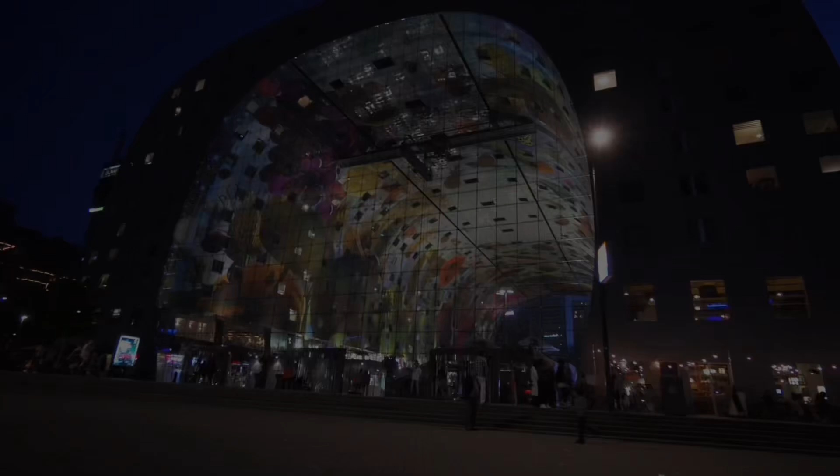Navigating the challenges of unstable soil, the construction of the Markthal in Rotterdam reflects the commitment to modern architectural innovation.

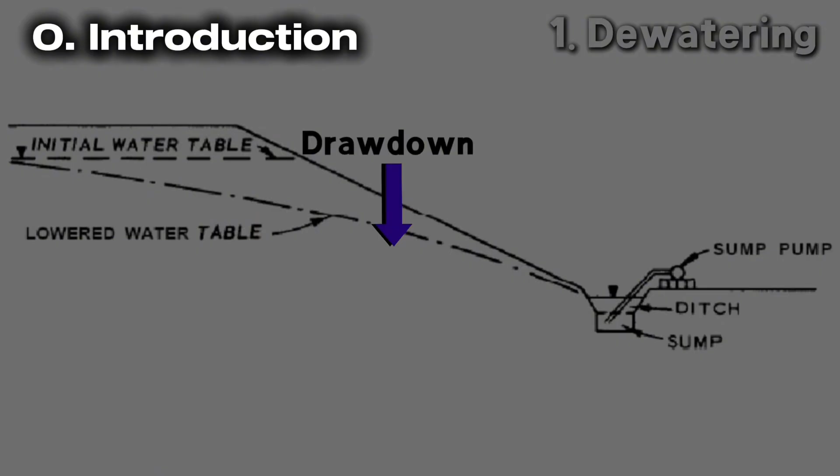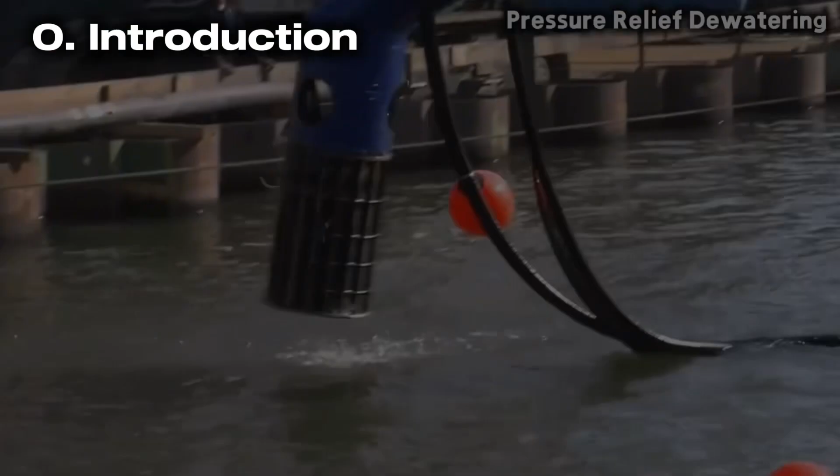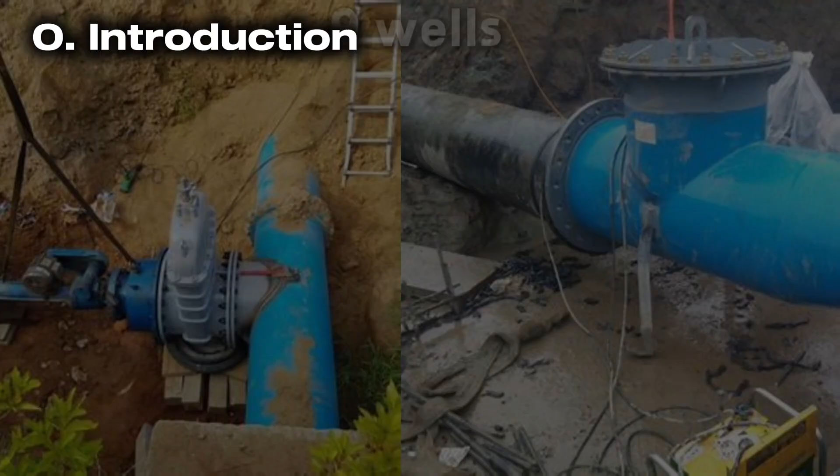After laying 480 tons of reinforcement, a 1.5-meter thick underwater concrete floor was poured and allowed to harden. Once the concrete set, the water was carefully pumped out, employing impermeable barriers and dewatering solutions to reveal a smooth, watertight floor capable of supporting up to 12,000 kilograms per square meter.

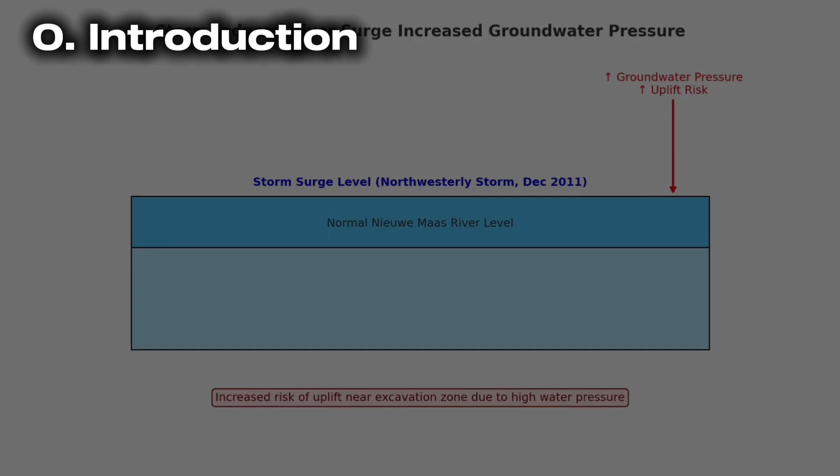With the foundation laid, the project moved upward to construct the unique horseshoe structure using the tunnel formwork system. Building the arch roof was a notable engineering endeavor, supported by temporary, mobile shuttering to accommodate the apartments and penthouses.

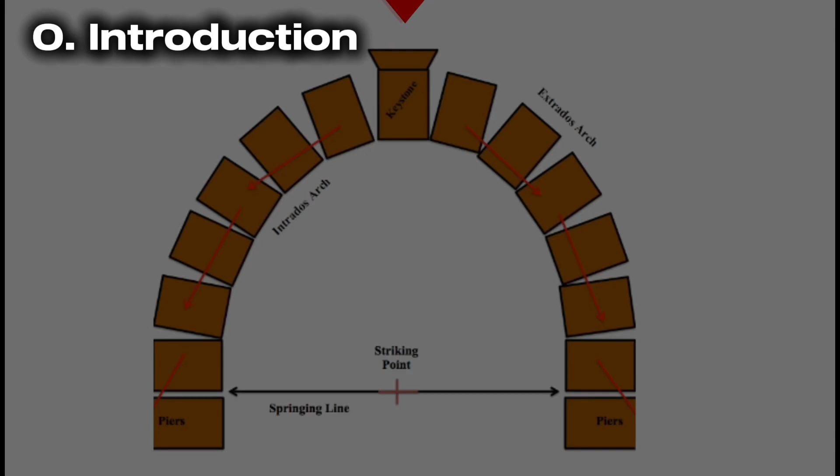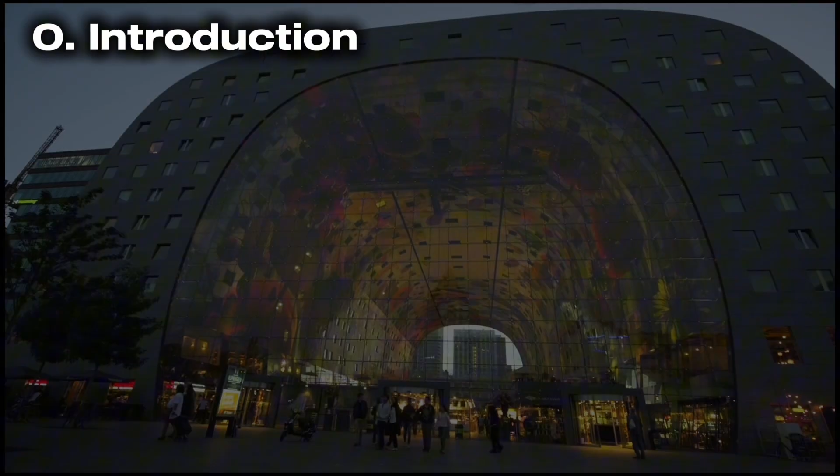Inside, the market hall features the Horn of Plenty artistic ceiling that spans 11,000 square meters, adding vibrant artwork to the space. The Markthal seamlessly blends market and residences, with single-glazed cable net glass facades enhancing transparency and connection to the city.

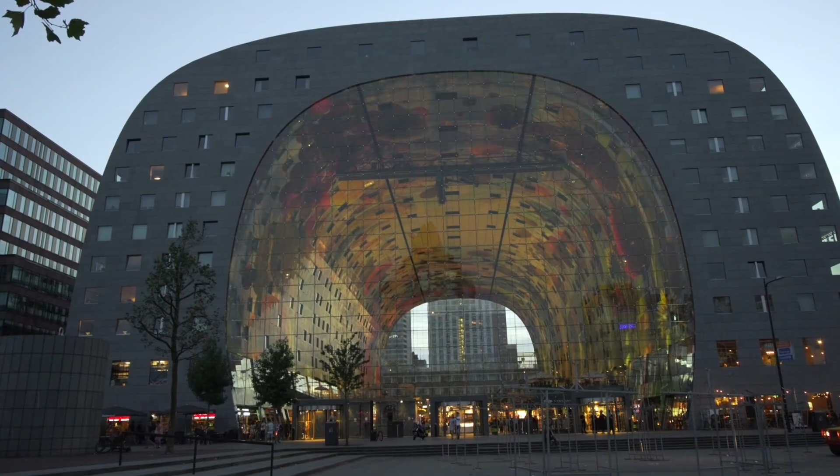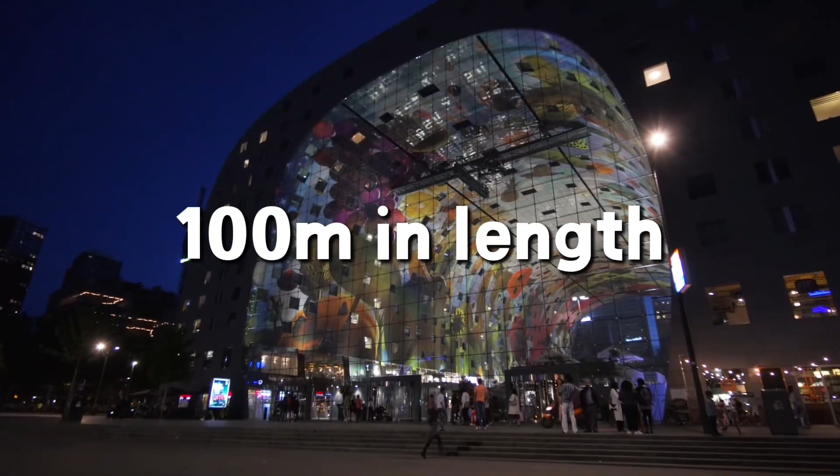The concrete arch structure formed the core of the Markthal, housing the market hall and supporting 228 apartments. Designed by MVRDV, the reinforced concrete arch spans 100 meters in length, 70 meters in width, and rises 40 meters high with a distinctive horseshoe-shaped profile.

It not only serves as the roof of the market hall, but also as the structural base for residential and commercial spaces built atop and within its volume, efficiently distributing loads across its span.

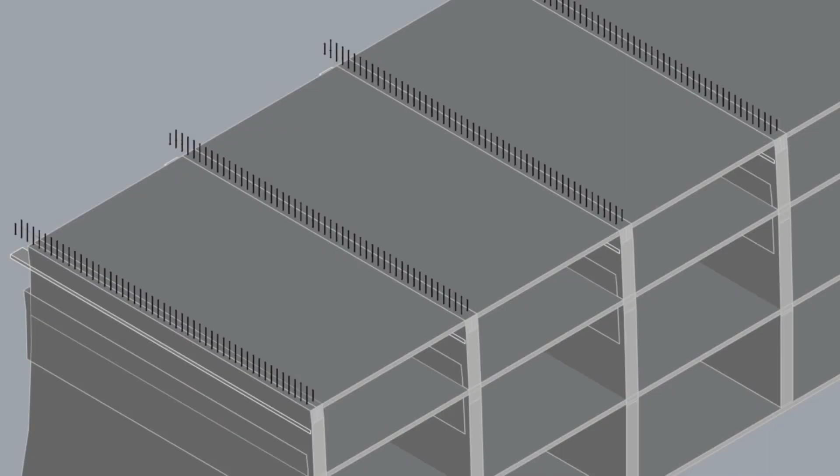To construct the apartment wings within this complex geometry, tunnel formwork played a crucial role. Known for its speed, labor efficiency, and high-quality finishes, this system was ideally suited for the repetitive modular design of the housing units. Tunnel formwork is a 50-years-old technique.

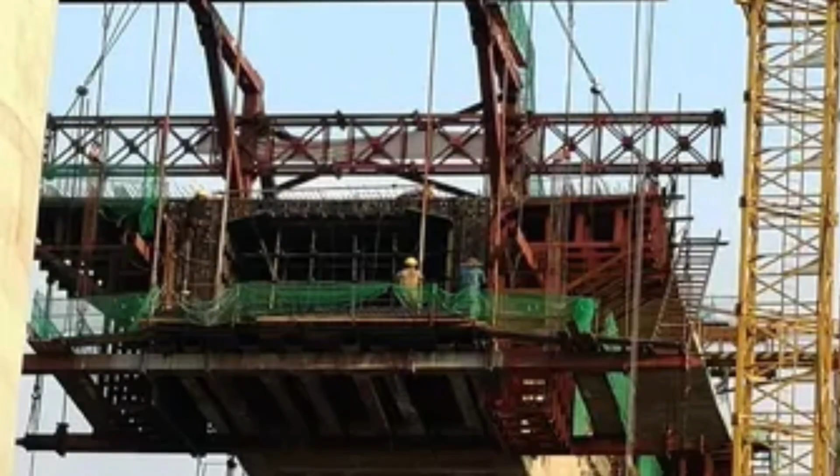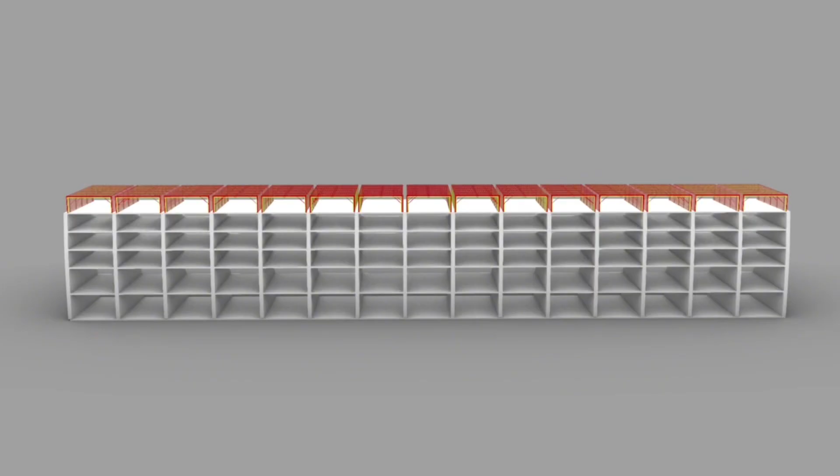It is basically an operation to cast walls and slabs in one operation in a daily cycle. It is adopted to have a monolithic structure. This technique is highly systematic, earthquake-proven, and provides an ideal solution to the critical problem of sound transmission.

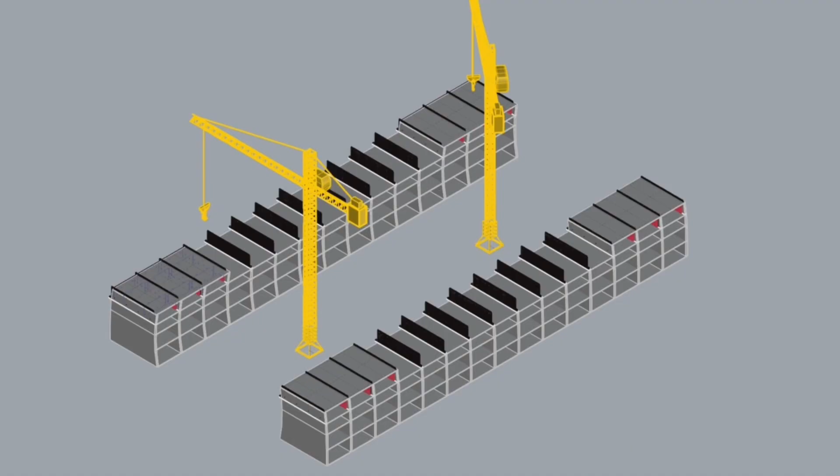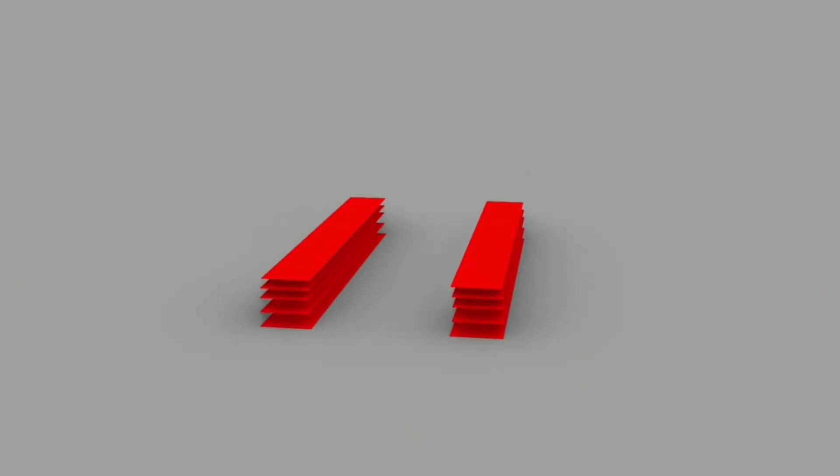Tunnel forms are inverted, L-shaped steel structures which are bolted together. This whole formwork can be moved to a specific place and height with the help of cranes. The technique gives a 24-hour construction cycle. The working cycle of the tunnel form system is mainly divided into 3 parts.

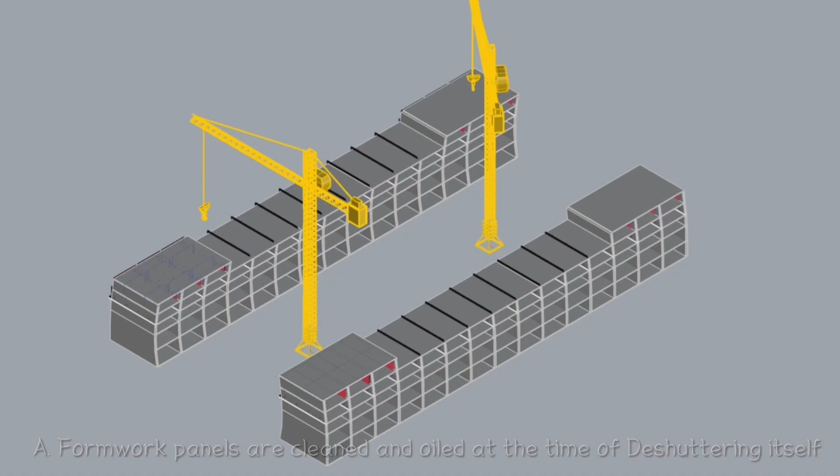Specifically, during deshuttering, formwork panels are cleaned, oiled, and prepared for reuse. Wall reinforcement is positioned, beams fitted, slab reinforcement mesh, and electrical plumbing conduits integrated, followed by casting walls, slabs, and kickers in a continuous pour.

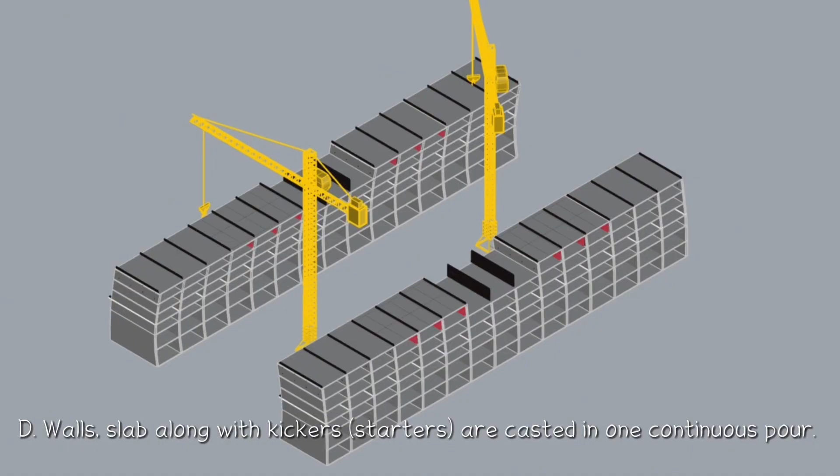Once set, the formwork panels are efficiently moved to the next site using a tower crane. From the second to the 10th floors, tunnel formwork was used. This created the structural framework for the sides of the arch, providing stability for subsequent stages.

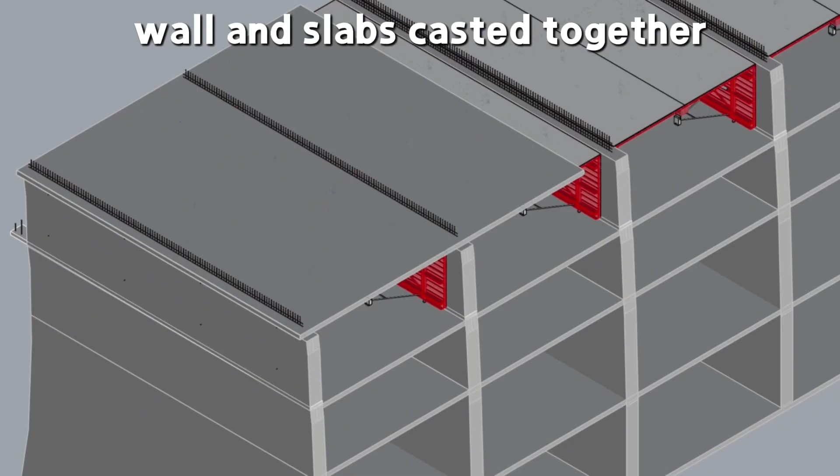J.P. van Eesteren utilized tunnel formwork for the construction of the 2 vertical legs of the Markthal. This choice was particularly suited for the repetitive nature of the residential units along each side of the arch. Unlike conventional methods where walls and slabs are cast separately, tunnel formwork allowed them to be poured together in a single, continuous operation for the Markthal's residential units from the 2nd to the 10th floor.

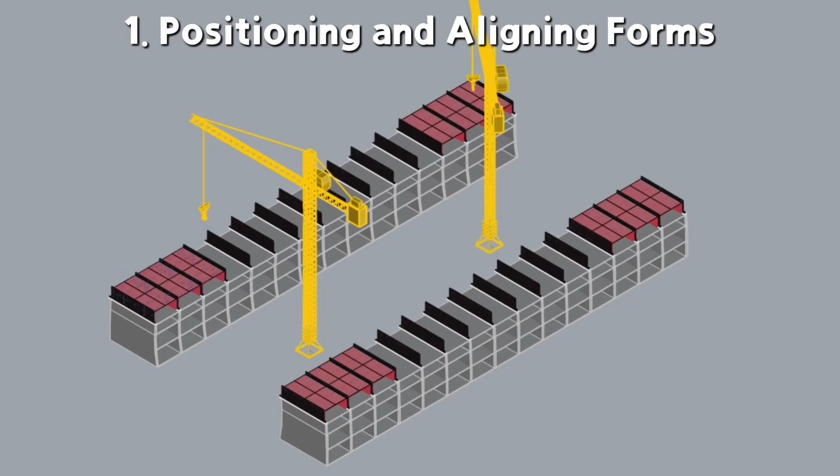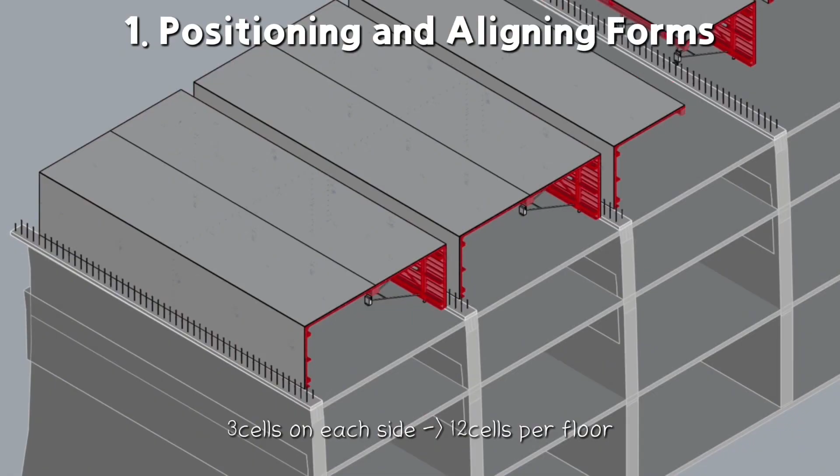The construction progressed floor by floor, each composed of 15 cells per side of the arch. A set of 12 tunnel forms were positioned and aligned simultaneously, enhancing efficiency, with 3 cells on each side of the arch. The use of these tunnel forms enabled the casting of 12 cells per floor within a streamlined 24-hour cycle.

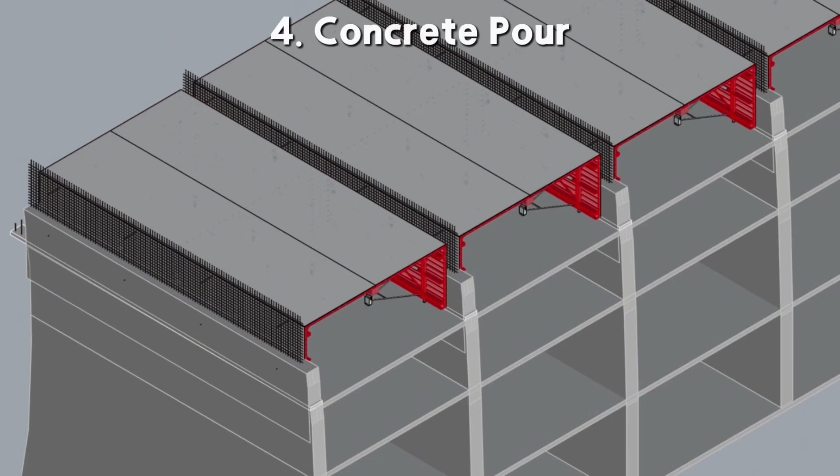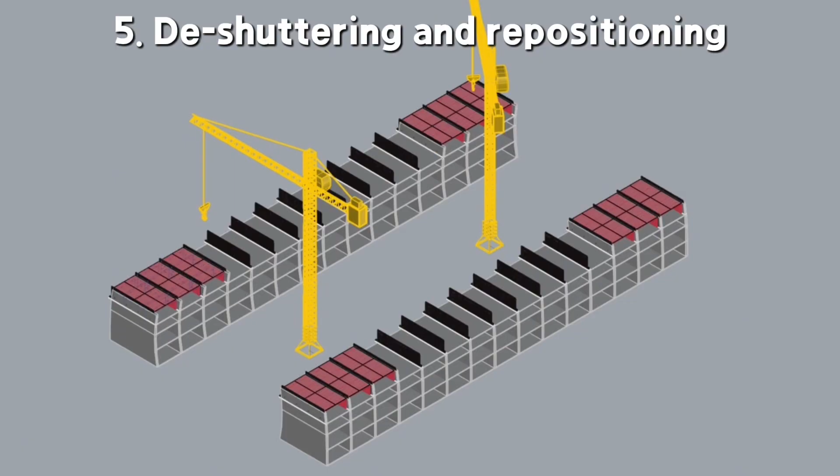Steel reinforcement bars were placed to ensure structural continuity throughout the building. Embedded services such as plumbing, electrical conduits, and ventilation ducts were incorporated before the concrete pour. Concrete for both walls and slabs was poured simultaneously for a monolithic structure. Once the concrete achieved sufficient curing, the forms were detached and prepared for the next cycle, which was then repeated for the subsequent 12 cells.

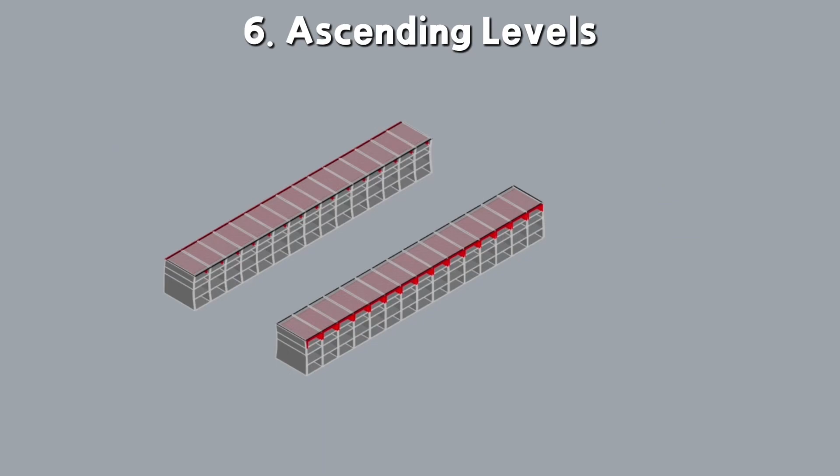The construction team maintained an efficient pace, allowing an entire floor to be finished in just 3 days. Afterward, the tunnel form units were hoisted to the next level using cranes, allowing the project to adhere to a tight timeline without compromising quality, ultimately speeding up the building process.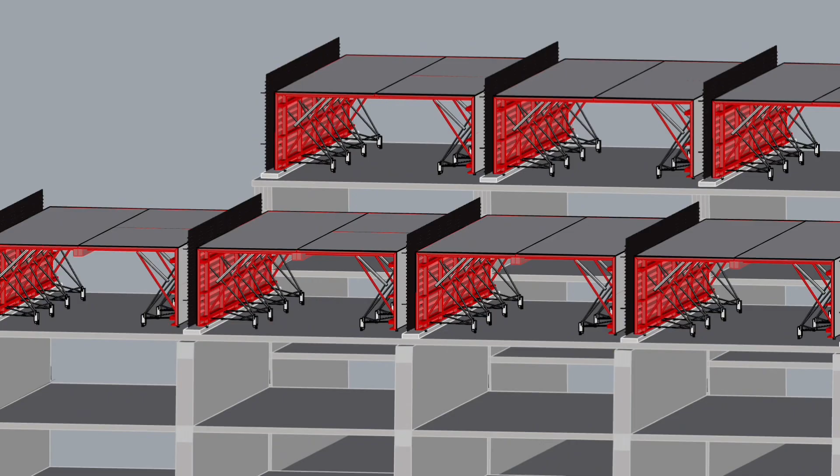The tunnel formwork system was traditionally used for linear, vertical building typologies, but during the construction of the Markthal, it was adapted to the Markthal's curved shape. At each ascending level, the angle of the apartment slabs was incrementally adjusted, allowing the 2 vertical legs to gradually curve inward and ultimately meet in the central apex, gradually forming the arch.

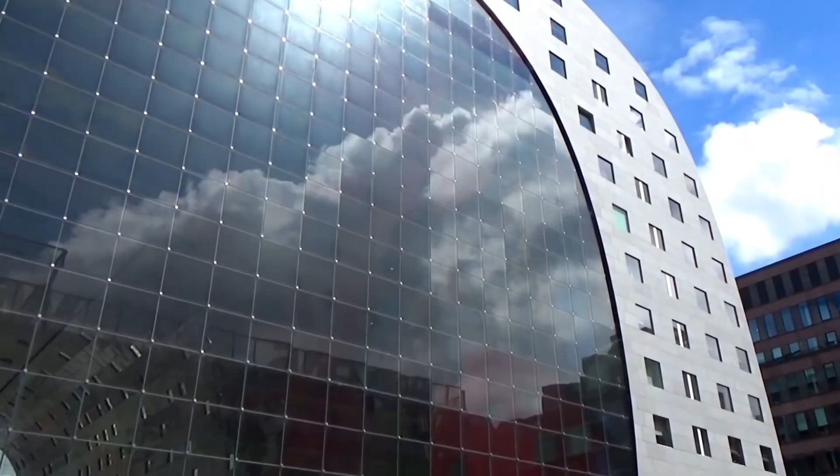This engineering solution showcased the versatility of tunnel formwork and its ability to adapt to complex architectural forms while preserving structural integrity and construction efficiency.

The arch was completed with the placement of a keystone element at the apex. This piece allowed the structure to transfer load effectively from the roof to the vertical legs or walls.

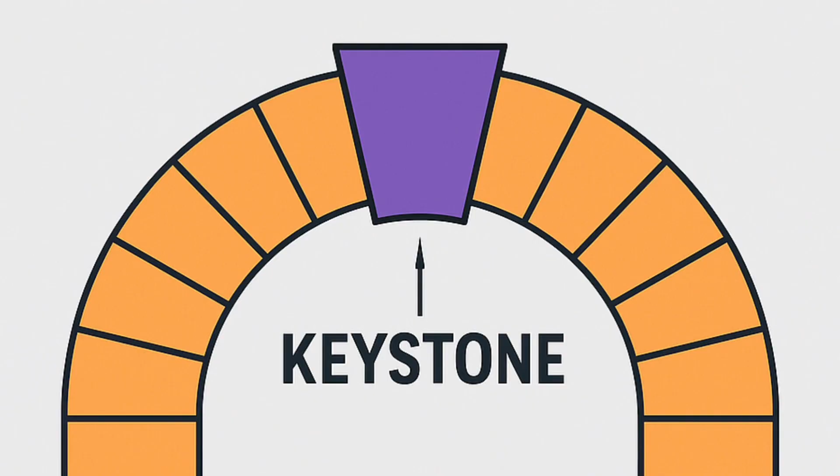Upon installation, the arch reached self-support, efficiently channeling loads down its curved surface to the supports and foundations without internal columns interrupting the space. The design allows loads from the roof and additional forces, like snow or wind, to transfer horizontally along the arch curve through compression.

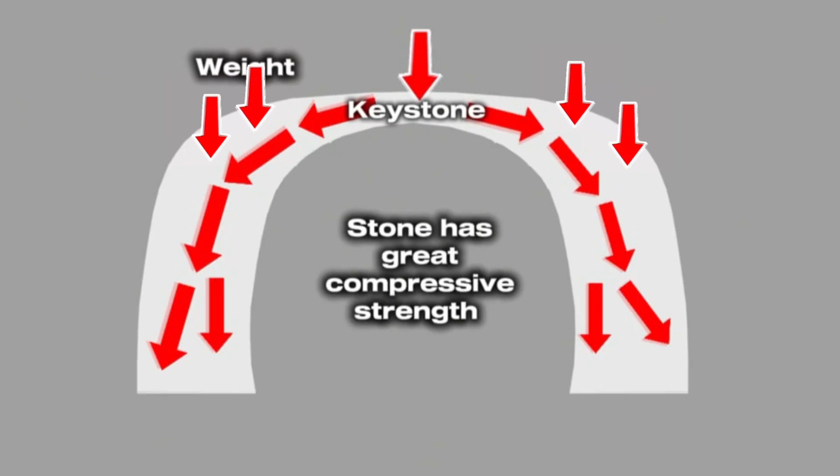This is facilitated by each voussoir pushing against its neighbors, turning vertical pressures into horizontal compressive forces. At the springing points, the structure experiences horizontal thrust, naturally occurring as the curve tries to spread under load, while robust vertical supports absorb these thrusts to prevent lateral displacement.

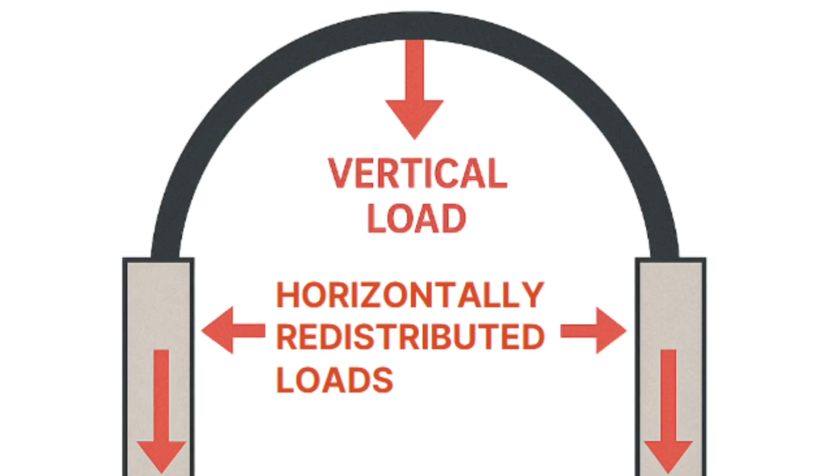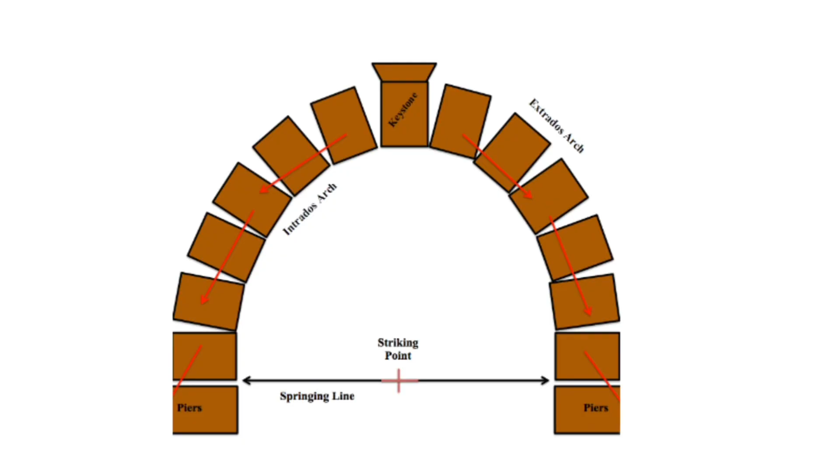Once redistributed, the loads are directed down to the foundations, ensuring it bears the structure's final weight and safely dissipates forces into the ground, preventing uneven settlement.

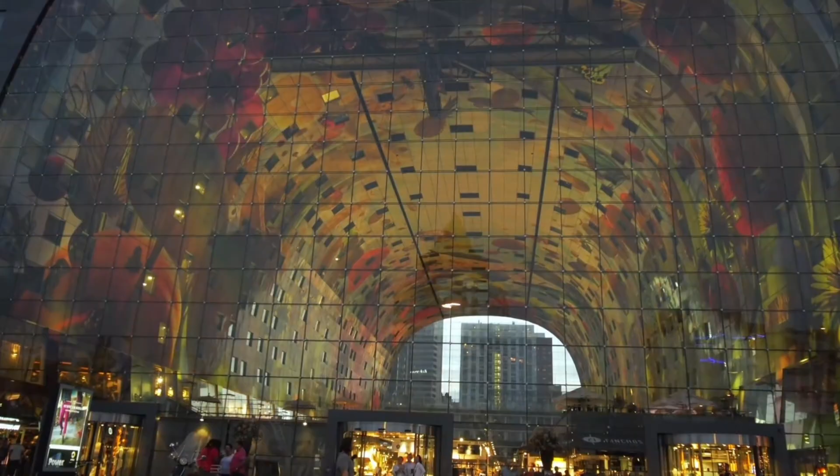The keystone's placement locks segments into a stable, purely compressive configuration, allowing the arch to maintain expansive interior spaces without additional internal supports in its role as a public market hall.

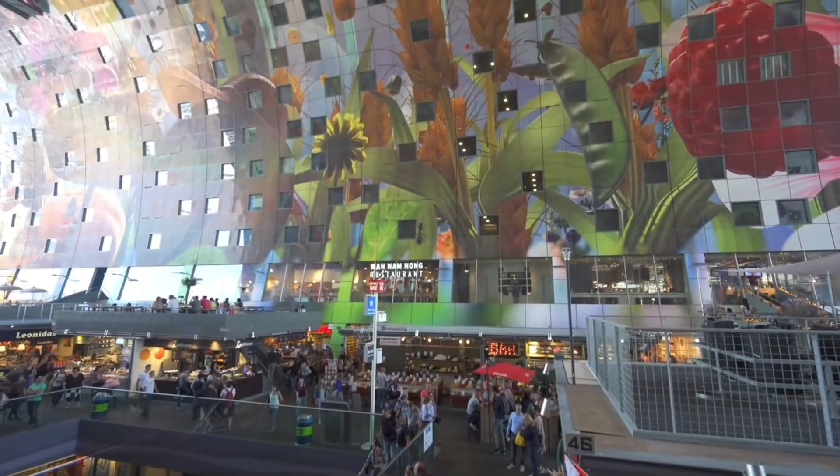Consequently, the Markthal's arch exemplifies engineering principles, efficiently managing force from roof to foundation, ensuring structural integrity and an iconic architectural presence with a vast, open interior.

The Rotterdam Markthal has a floor surface equivalent to that of a soccer field. The walls of the hall were constructed using normal building methods. However, the roof construction, including the penthouses, provided a particular challenge.

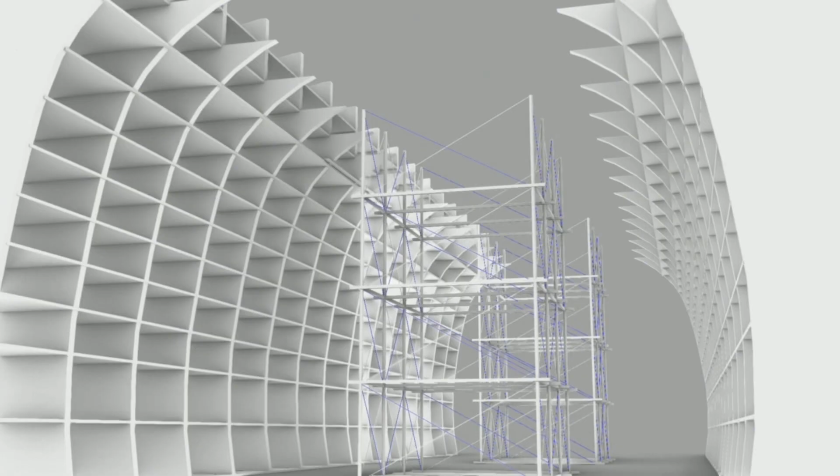The arch was constructed from 4 primary segments, each carefully placed to maximize stability and load distribution. The process began by building the 2 middle sections first, followed by the 2 outer sections.

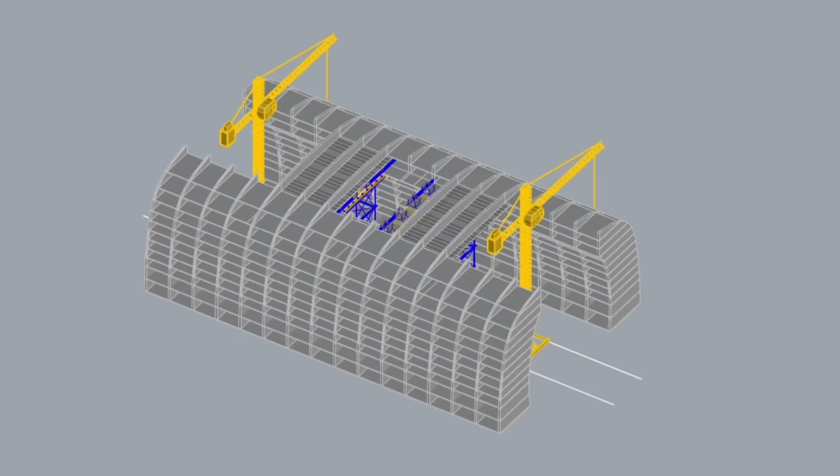For each of the 4 roof sections, temporary supports were critical. 2 substantial temporary support towers were erected under the arch, providing stability to the sections during the construction and curing phases. This method ensured precise alignment and enhanced structural integrity.

These temporary supports were moved as the roof sections were built, serving as mobile shuttering systems. Mobile shuttering systems are construction formwork that can be moved easily, reducing the need for frequent erection and dismantling.

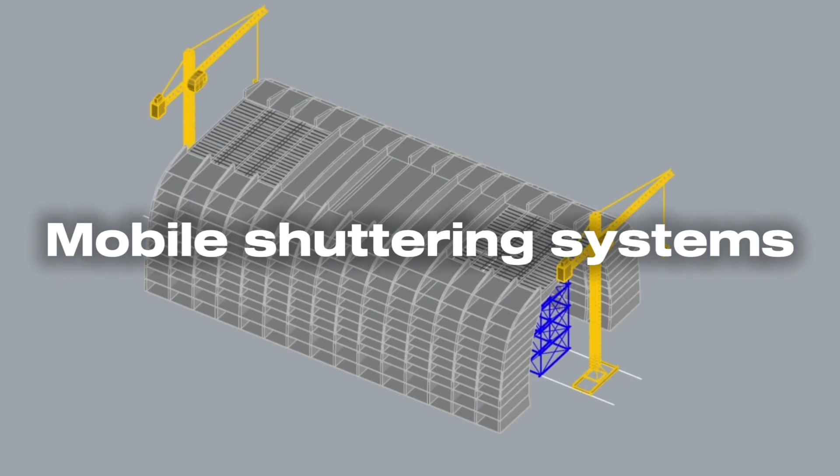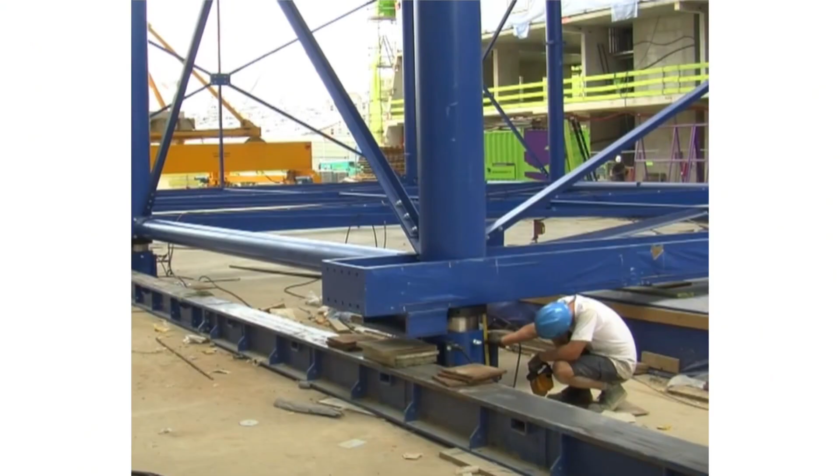This temporary support had to function as a mobile formwork in the vertical direction. It also needed to be movable horizontally. CT de Boer Spanlift designed and built this mobile shuttering construction.

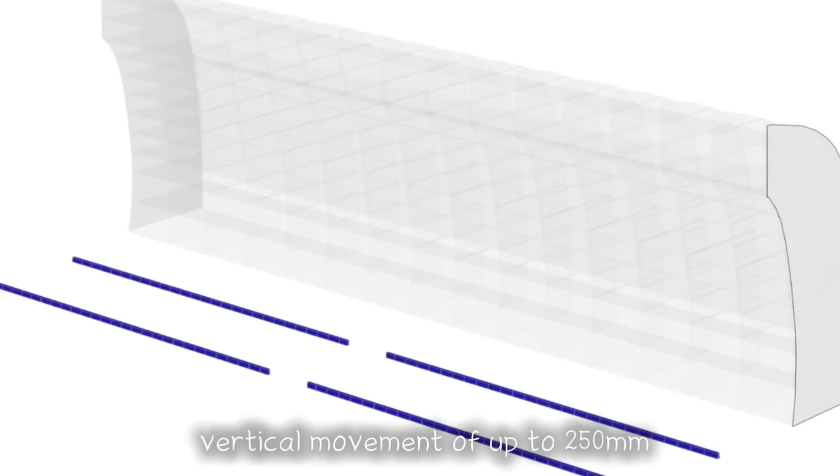For the vertical direction, the temporary support had to bear a maximum load of approximately 3,000 tons. To manage vertical movement of up to 250 millimeters at 8 lifting points, Hymatro provided 8 locknut cylinders, each capable of handling 680 tons with a 250 millimeter travel distance.

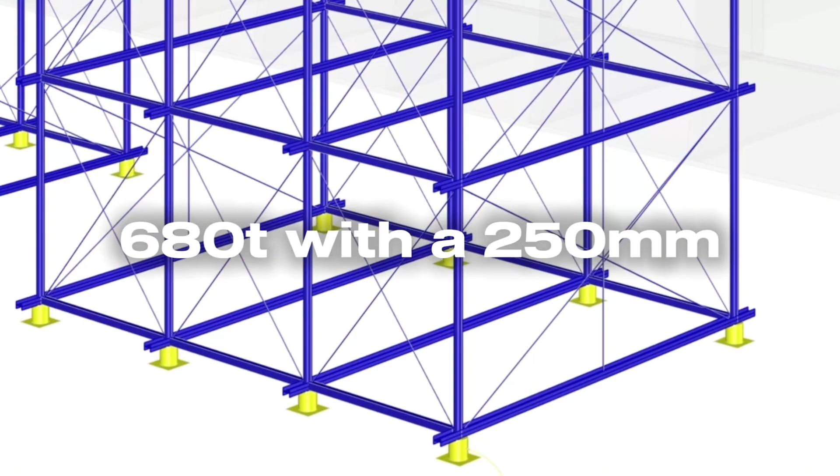These locknut cylinders were mounted under the posts of the shuttering construction. The control of the cylinders allowed the formwork to be raised precisely to the correct height to pour the concrete arch and position the concrete elements.

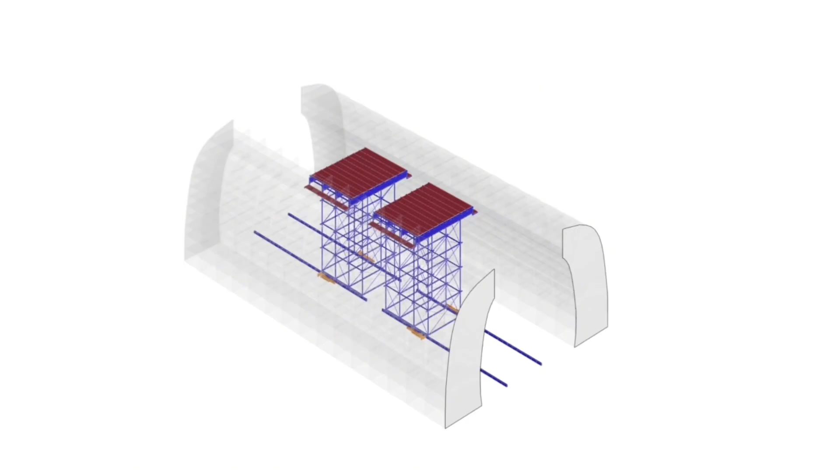After a few days, the entire support system, mounted on a proprietary sliding mechanism, was moved horizontally from the inside to the outside, shifting to its new position. This same system is also used for relocating tower cranes.

A 3,000-ton hydraulic skidding device, such as those deployed by CT de Boer, is a high-capacity mechanical system designed to move extremely large and heavy constructions with exceptional precision using hydraulic power.

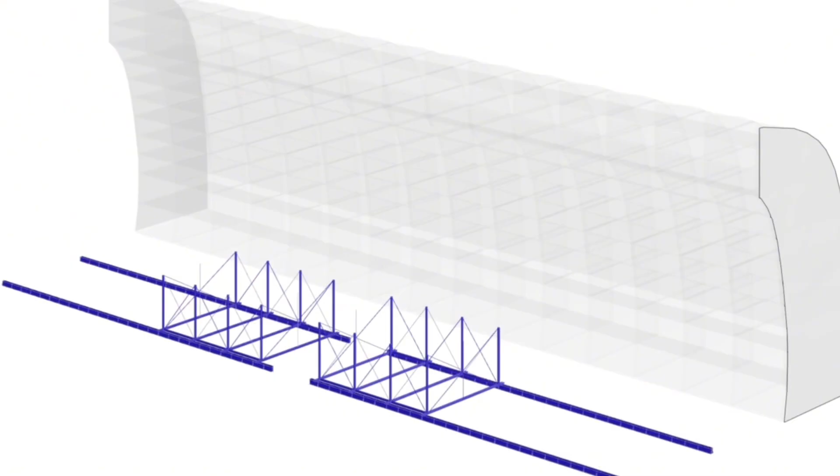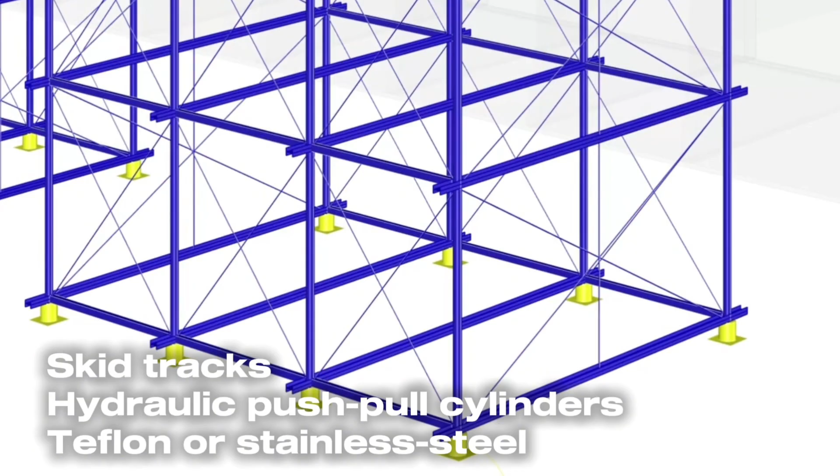CT de Boer's skidding systems are comprised of skid tracks, hydraulic push-pull cylinders, and Teflon or stainless steel sliding surfaces, all engineered to reduce friction and ensure smooth, controlled movement.

The object to be relocated, like this massive formwork, is placed on skid shoes. Then hydraulic cylinders incrementally push or pull the structure along the track.

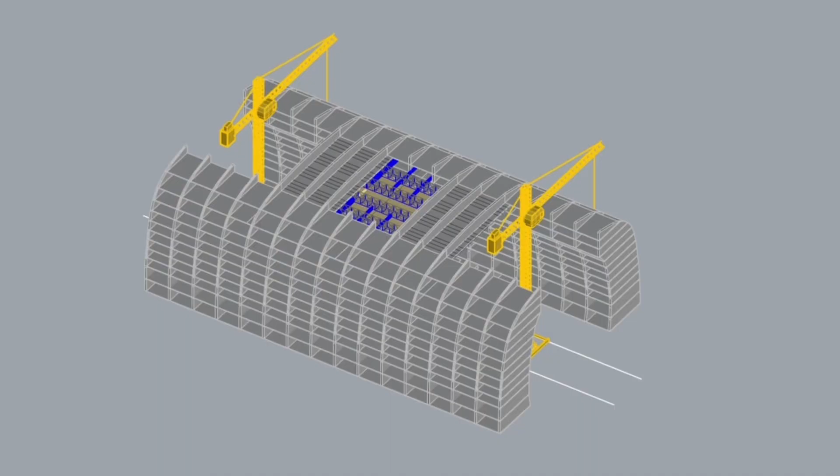These systems operate at pressures of up to 700 bar, 10,000 psi, using hydraulic pumps to control oil flow into cylinders, delivering the necessary force for each phase of movement. This cycle of action was repeated until the entire roof construction was completed.

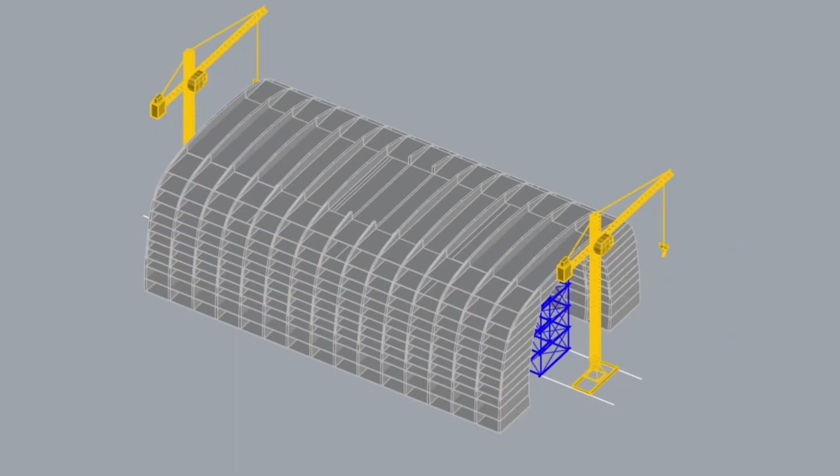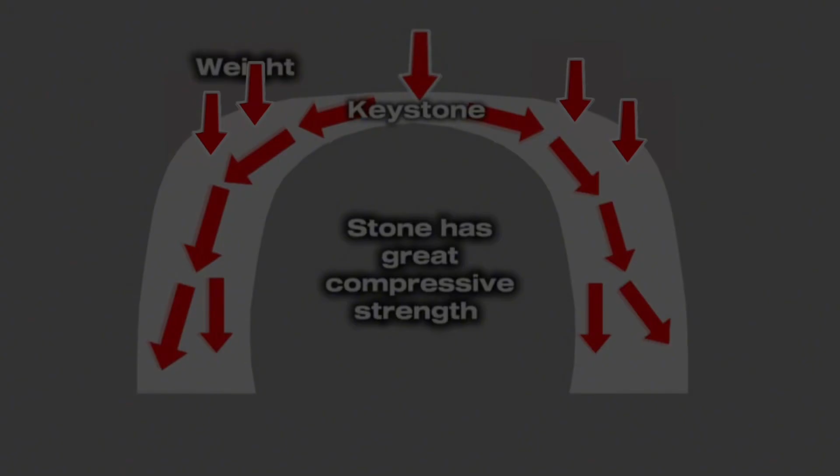This week, we focused on the construction of the iconic arch, the tunnel formwork system, the mobile shuttering system, and completed with a central keystone. Next week, we'll explore the Markthal Energy Performance and Indoor Comfort.

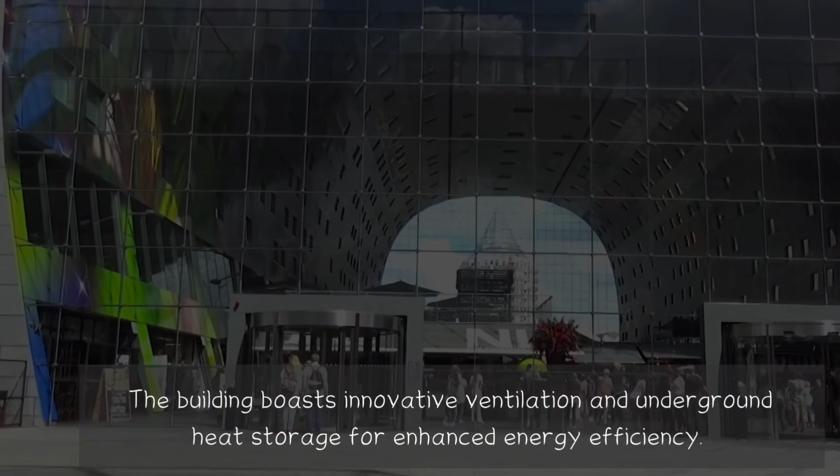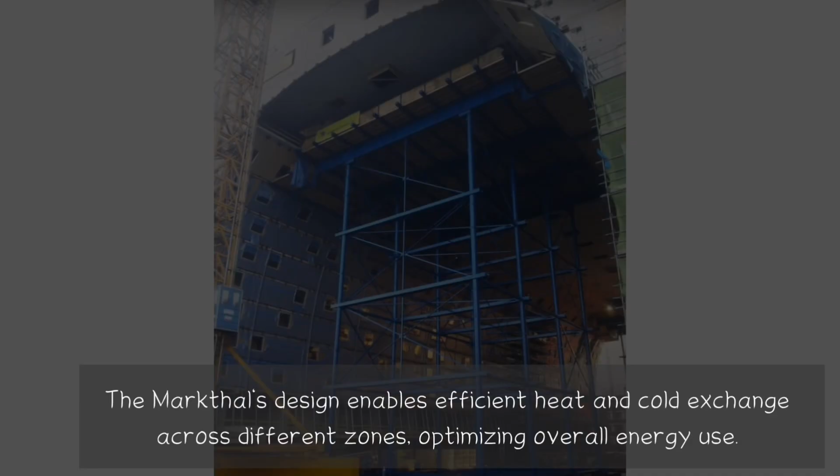The building boasts innovative ventilation and underground heat storage for enhanced energy efficiency. Linked to the city's heating grid, its thermal storage system also heats and cools nearby buildings. The Markthal's design enables efficient heat and cold exchange across different zones, optimizing overall energy use.

The main hall features a naturally ventilated system where air flows in through the glass facade, rises, and exits via ventilation shafts, creating a self-sustaining thermal environment.

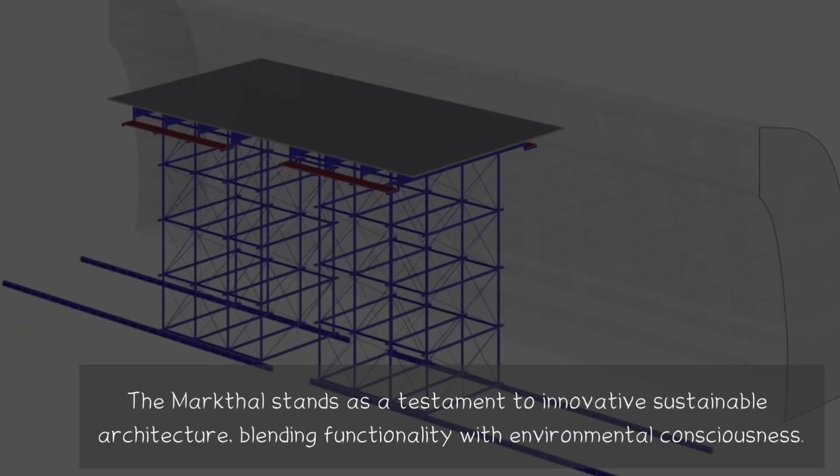The Markthal stands as a testament to innovative, sustainable architecture, blending functionality with environmental consciousness.